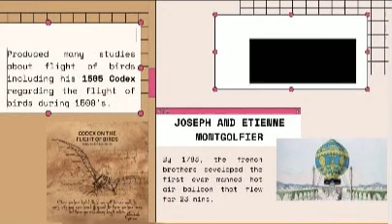For the next one, we have Jacques Charles. 10 days after the first manned hot air balloon, he flew the first ever gas balloon.

For the fifth one, we have George Cayley, known as the father of aerial navigation. He believed that the study of kites unlocked the secrets of winged flight. He also tested the first full-size man-carrying aircraft.

For the sixth one, we have William Samuel Henson. He designed a huge monoplane that was propelled by a steam engine housed inside the fuselage. A monoplane has one fixed wing, and that's what William Samuel Henson designed, propelled by a steam engine housed inside the fuselage.

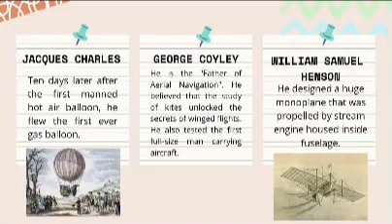For the seventh one, we have Otto Lilienthal. He proved that human flight in aircraft heavier than air is practical. He also worked towards the dream of powered flight.

For the last one, we have Wilbur and Orville Wright. They flew and constructed the biplane, also called the flyer. If we have a monoplane, we also have a biplane, which has 2 fixed wings. So these are the people who contributed to the history of flight.

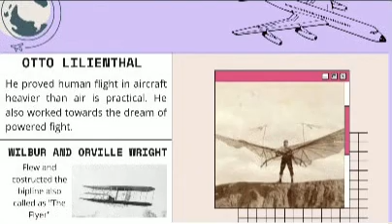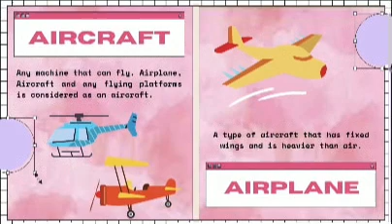What is the difference between aircraft and airplane? An aircraft is any machine that can fly. Examples of aircraft are airplanes, and any flying platforms. Helicopters, monoplanes, and biplanes are considered aircraft. So what's an airplane? An airplane is a type of aircraft that has fixed wings and is heavier than air. So an airplane is a kind of aircraft.

For our next topic, we have aircraft structure: lift and aerodynamics. These are the four forces that act upon an aircraft in relation to straight and level unaccelerated flight. These forces are thrust, lift, weight, and drag.

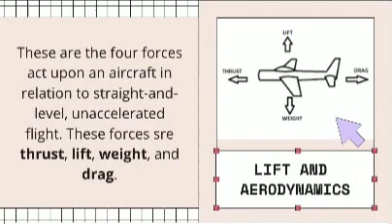Thrust is the forward force produced by the power plant or propeller, acting in front. Lift opposes the downward force of weight; it is produced by the dynamic effect of the air acting on the wing. Weight is the combined load of the airplane itself, the crew, the fuel, and the cargo or baggage. Drag is the rearward retarding force, caused by disruption of airflow by the wing, fuselage, and other protruding objects. So these are the descriptions of thrust, lift, weight, and drag.

An aircraft moves in 3 dimensions and is controlled by moving it about one or more of its axes. So it has 3 dimensions and is controlled in its movement along one or more axes. The first is pitching.

Pitching is rotation in the lateral axis, the side-to-side rotation. It is also called elevator control pitch.

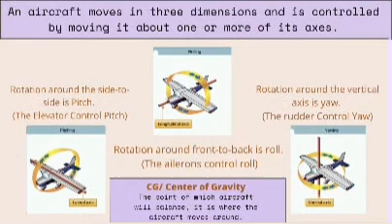Here's a little trivia: CG, or center of gravity, is the point at which the aircraft will balance. It is where the aircraft moves around. So for pitching, rolling, and yawing, the rotation happens around the center of gravity.

For the third topic, we have the major components of an aircraft. First is the wings. These are the airfoils attached to each side of the fuselage, and are the main lifting surfaces that support the airplane in flight.

Monoplanes are airplanes with a set of single wings, and those with two sets are called biplanes. We have three principal structural parts of the wings.

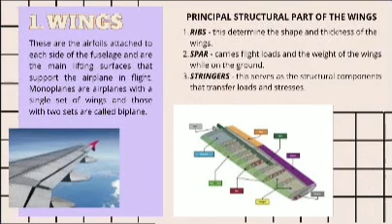First are the ribs, which determine the shape and thickness of the wings. Second is the spar, which carries flight loads and the weight of the wings while on the ground. Last are the stringers, which serve as structural components that transfer loads and stresses.

Second is the fuselage. This is the central body of an airplane and is designed to accommodate the crew, passengers, and cargo. So when we board an airplane, where we sit is part of the aircraft fuselage.

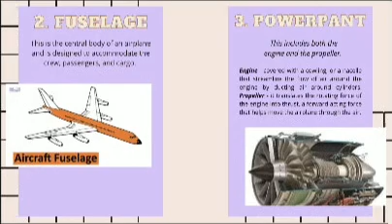Third is the power plant. This includes both the engine and the propeller. The engine is covered with a cowling or nacelle that streamlines the flow of air around the engine by ducting air around cylinders. The propeller translates the rotating force of the engine into thrust, a forward-acting force that helps move the airplane through the air.

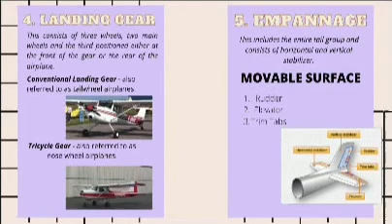Fourth is the landing gear. This consists of three wheels: two main wheels, and the third positioned either at the front or the rear of the airplane.

The landing gear really has three wheels: two main wheels, and the third positioned either in front of or behind the two main wheels. There are two kinds of gears: conventional landing gear, also referred to as tailwheel airplanes, where the third wheel is located at the back. And tricycle gear, also referred to as nose wheel airplanes, where the third wheel is located at the front. That's the difference between them.

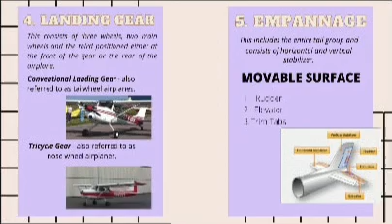Fifth is the empennage, which includes the entire tail group and consists of the horizontal and vertical stabilizer. The empennage has movable surfaces, which are the rudder, elevator, and trim tabs.

For our last topic, we have types of aircraft construction. First is the truss structure. The main drawback of the truss structure is its lack of a streamlined shape. Also, in this construction method, lengths of tubing called longerons are welded in place to form a well-braced framework.

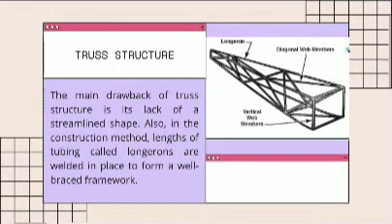Next we have monocoque construction, which uses stressed skin to support almost all loads. Although it is very strong, the construction is not highly tolerant to deformation of the surface.

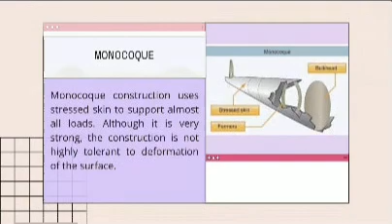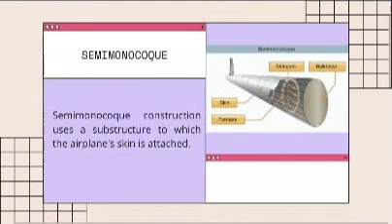Lastly, we have semi-monocoque construction, which uses a substructure to which the airplane's skin is attached. We can see in the pictures additional parts such as the bulkhead, stringers, skin, and formers.